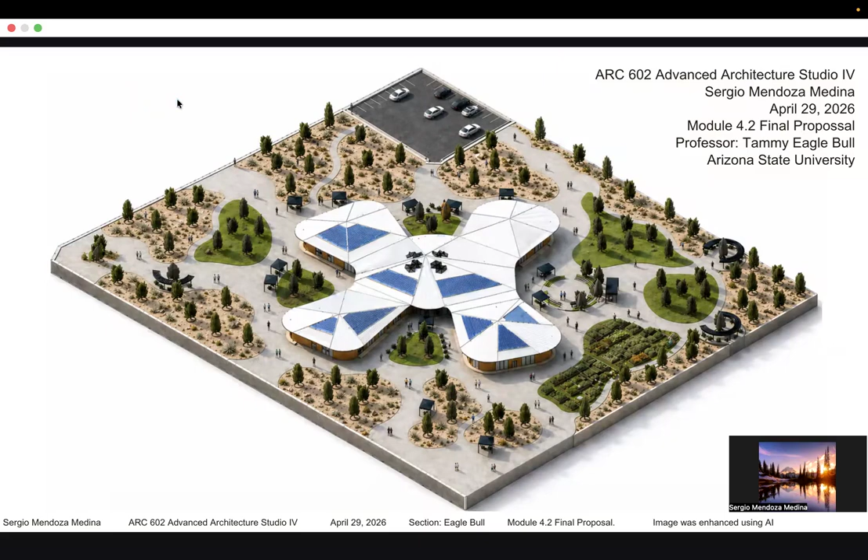This project is an Indigenous Student Services Center at ASU in Tempe, Arizona, focused on placekeeping, cultural continuity, and environmental response. I will briefly walk through the project from site to concept to design development and end with the final statement.

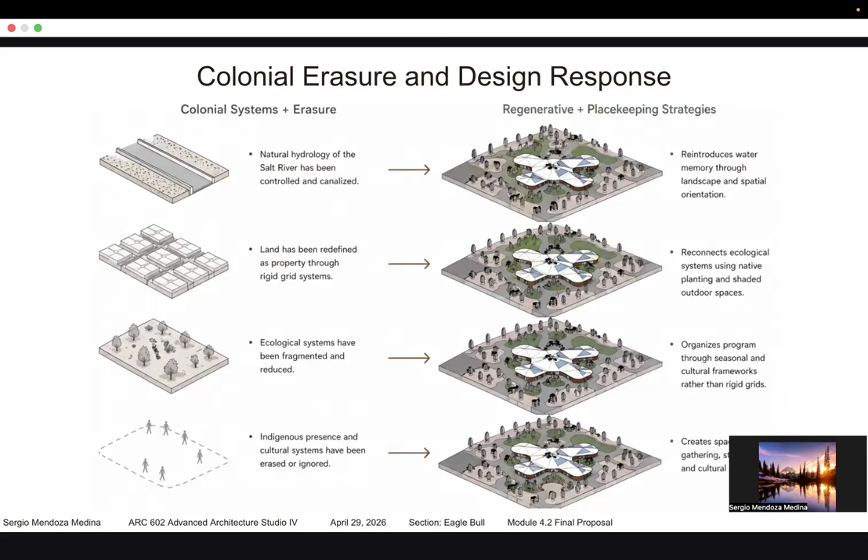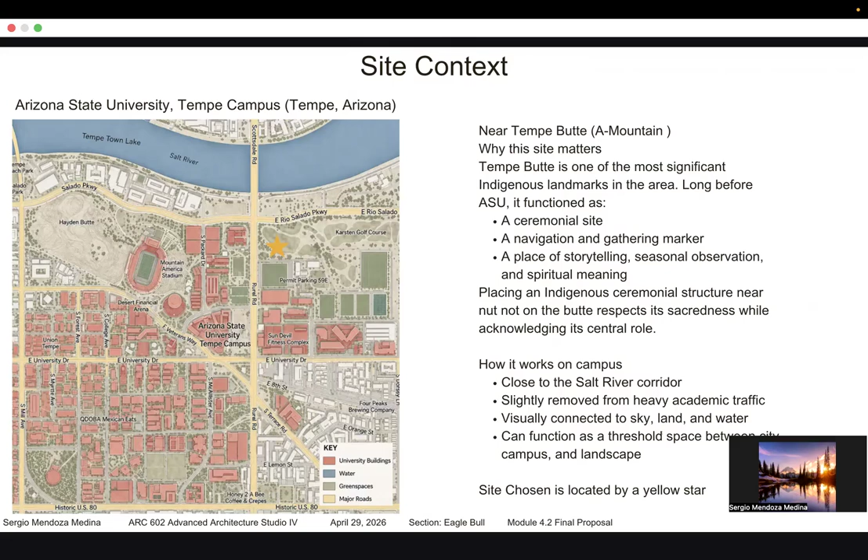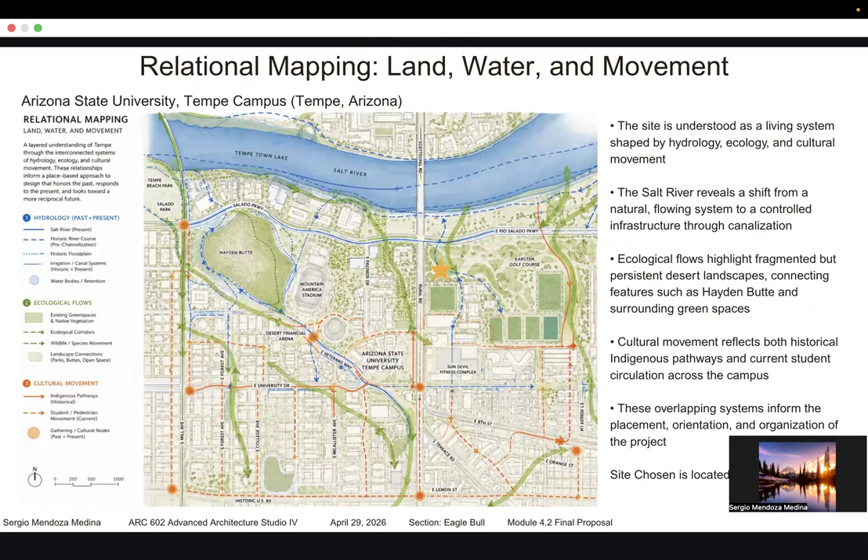This diagram shows the site as a living system. We see three main layers: water systems, especially the transformation of the Salt River; ecological systems, including desert vegetation and connections; and cultural movement, both historic pathways and current campus circulations. These layers directly inform how the building is placed and organized.

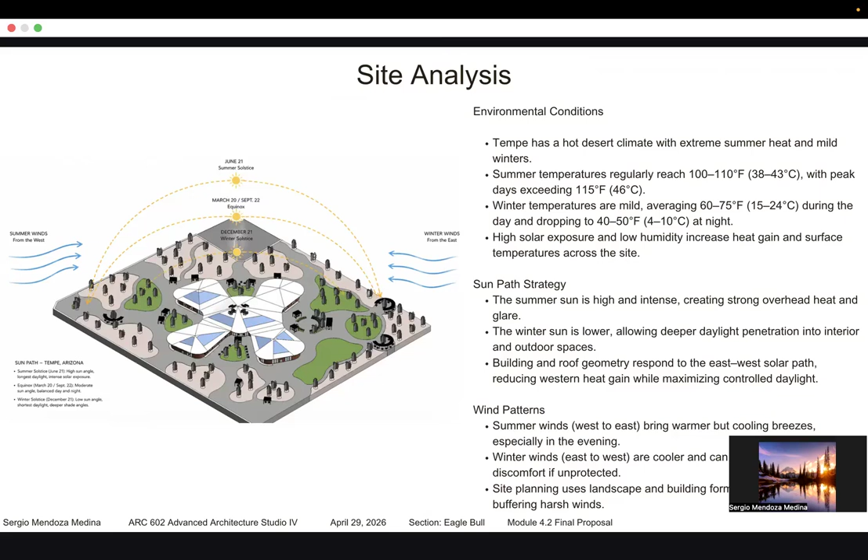Tempe has an extreme desert climate. Summers reach over 110 degrees, while winters are mild. The design responds through controlled solar exposure, with roof form and orientation using wind patterns for natural ventilation that reduce heat gain while allowing winter sunlight. This creates a more comfortable and energy efficient environment.

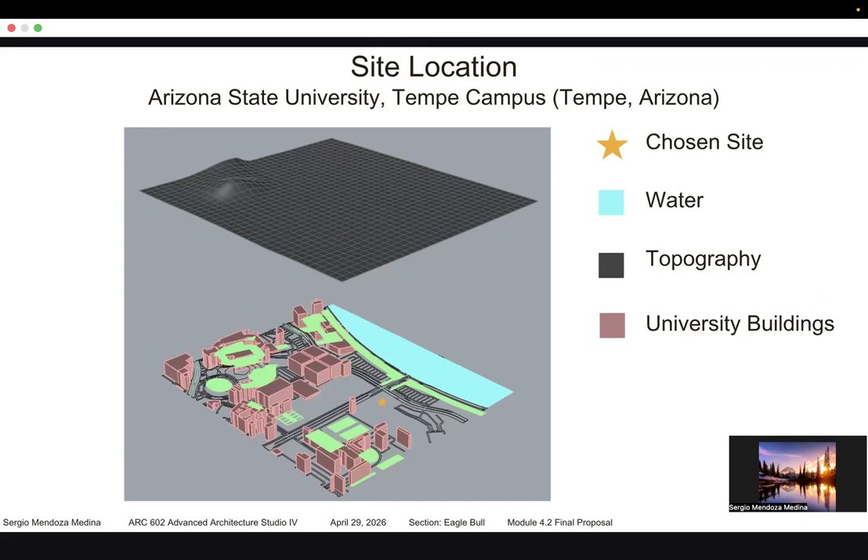This diagram highlights the chosen site in relation to water, topography, and surrounding campus buildings.

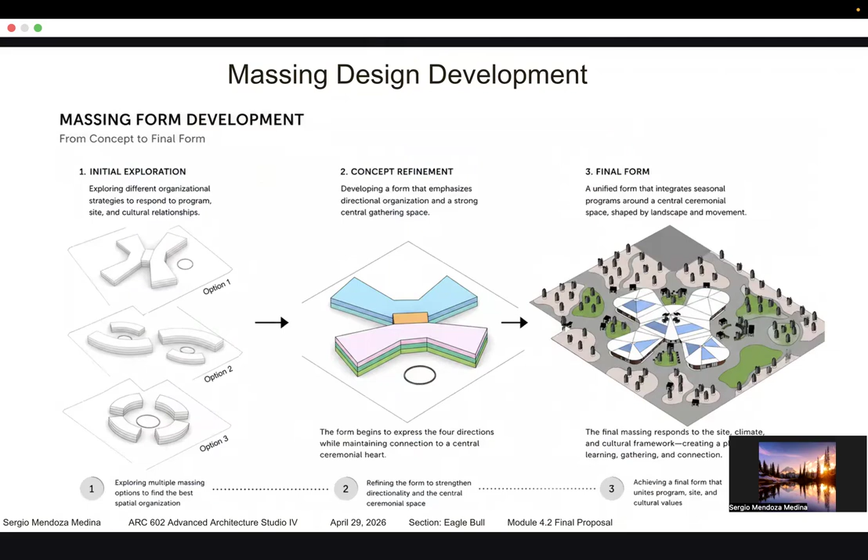The form development goes through three stages, starting with multiple explorations, then refining into directional form, and finally creating a unified building. The final massing connects all programs to a central ceremony space while responding to site and climate.

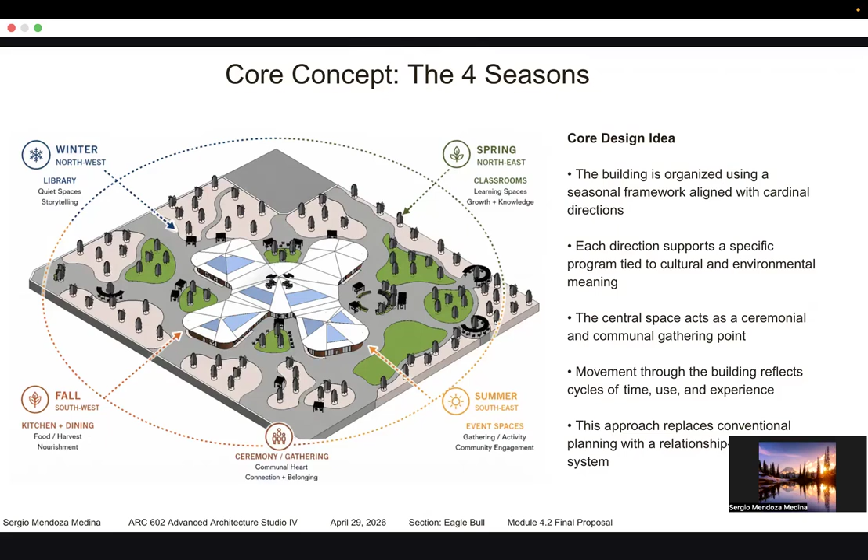The main idea is organizing the building through four seasons. Each direction represents a different program and cultural meaning: spring for learning, summer for gathering, fall for food, winter for reflection. At the center is a ceremonial gathering space. This replaces a typical floor plan with a relationship-based system tied to time and nature.

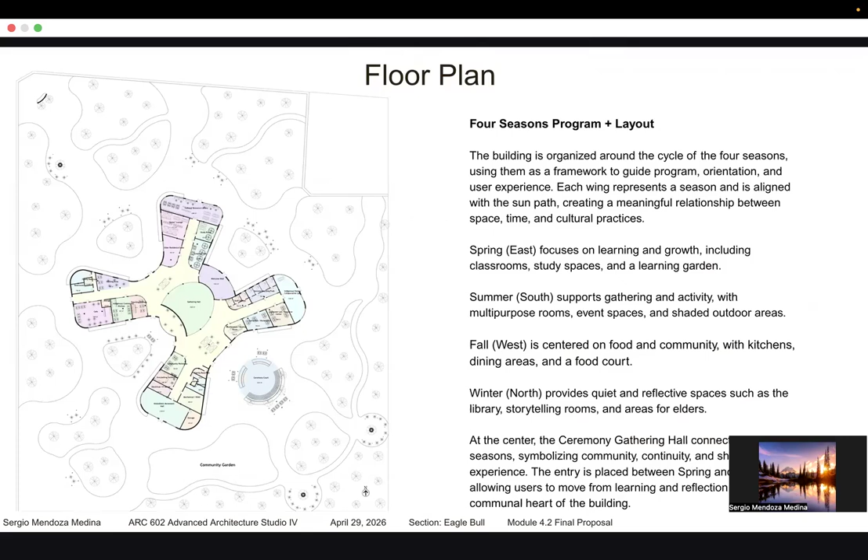Here is a floor plan showing how that concept is applied. Each wing aligns with a seasonal path and program. East has classrooms and learning spaces. The south has event and gathering areas. West has kitchen and dining, and north has a library and quiet spaces. The center connects everything through the gathering hall, creating a continuous experience.

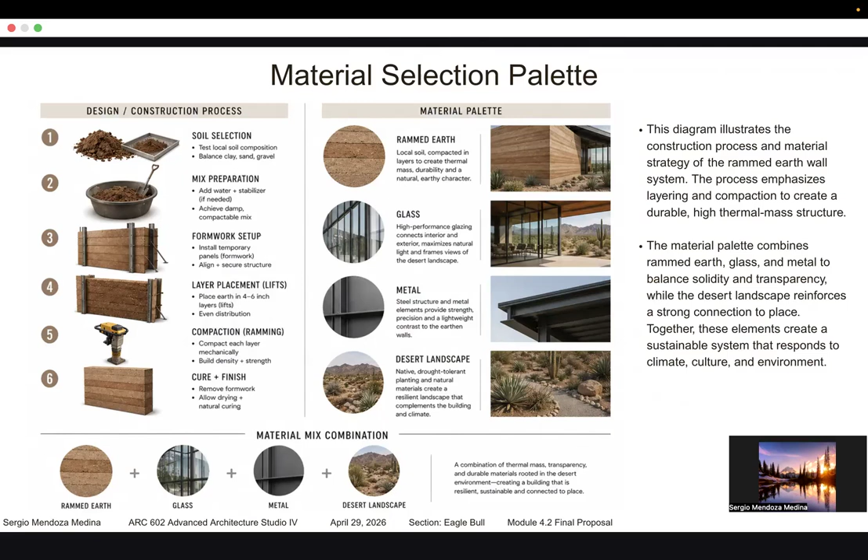The material palette reinforces connection to place. Rammed earth provides thermal massing and ties to the desert. Glass allows light and visibility through the building. Metal supports structure and durability. Native landscape integrates the building into its environment. Together they balance performance and cultural meaning.

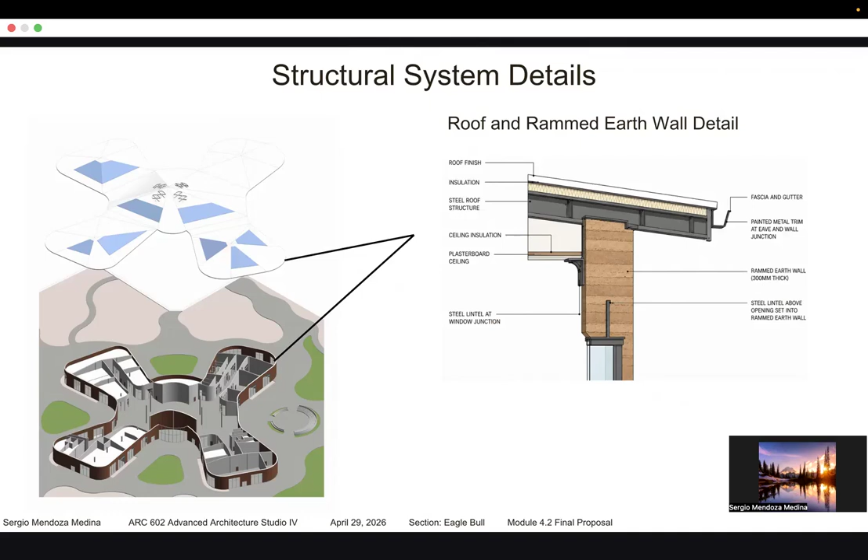The structure combines rammed earth walls with a metal roof system. The roof sits on a steel plate above the wall, creating a strong connection. Here we have the structural system for the interior walls.

The program is organized around a central community core. It includes learning and academic spaces, cultural and reflection areas, food and gathering spaces, and administrative and support areas. All spaces are connected through clean circulation and shared experiences.

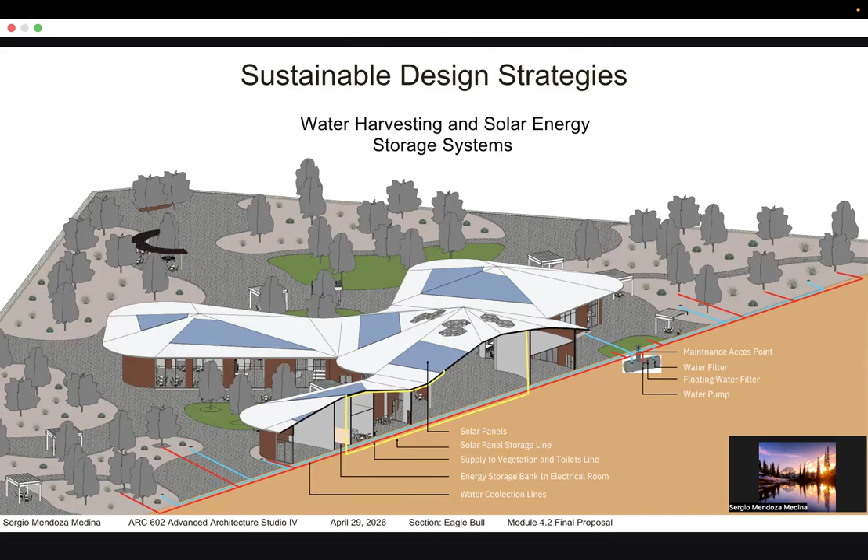Another passive strategy is water harvesting and solar systems, along with creating an atrium that provides stack ventilation at all five points of the building. Solar panels are placed on the roof, and large overhangs reduce direct solar radiation.

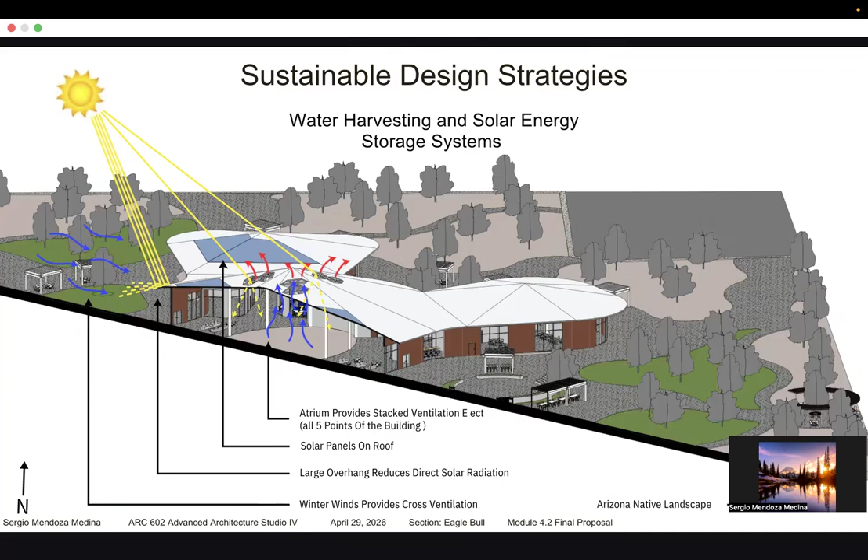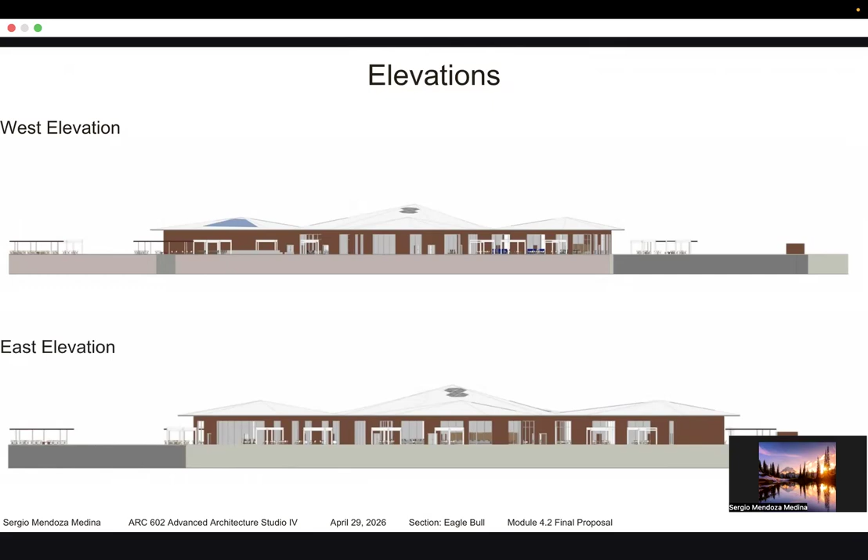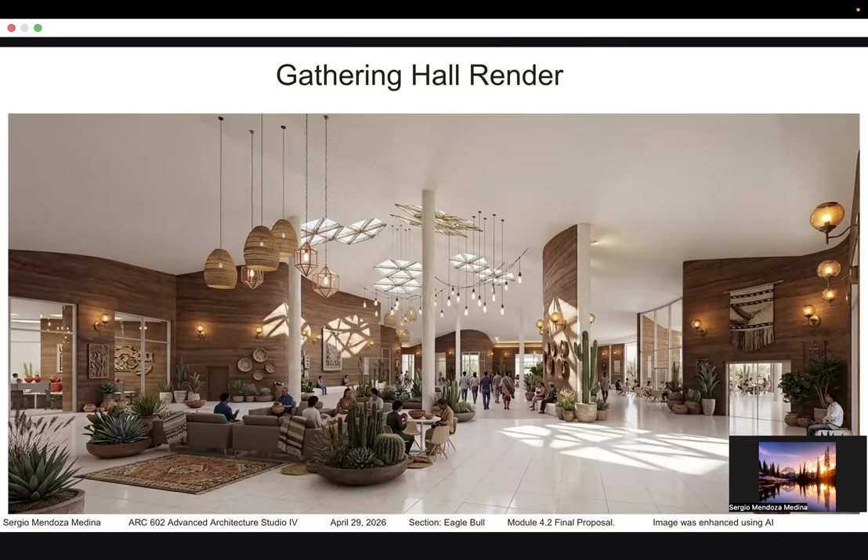Here we have some renders of the gathering hall, showcasing how the atrium provides natural light into the building, and the cafe, which is a daily social hub.

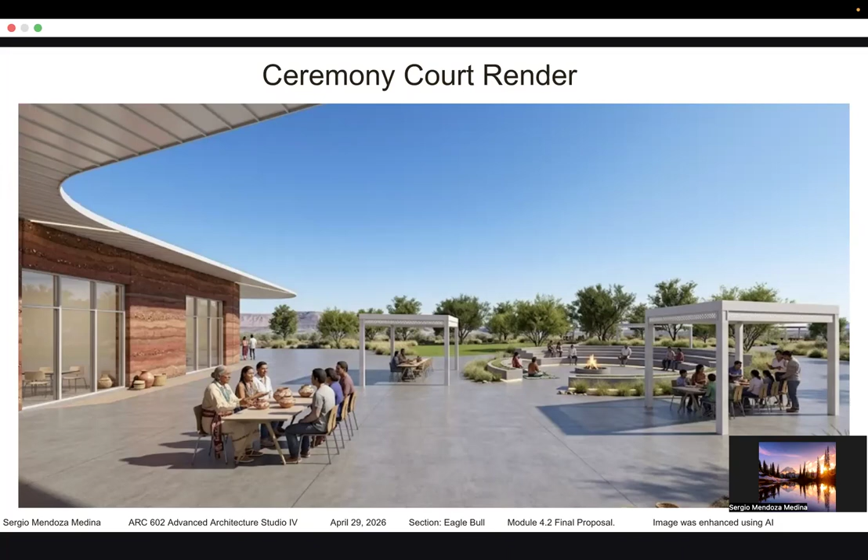The ceremony court for outdoor gathering demonstrates how the community can come together to address cultural awareness and issues. And the welcoming wall highlights cultural identities. Together they show how the building supports both everyday use and cultural events.

Last but not least, this project shifts architecture from an object to a system of relationships. It reconnects land, culture, and community through placekeeping. By using seasonal organization, material strategy, and environmental design, it creates a space for belonging and continuity. Ultimately, it supports both present and future generations.